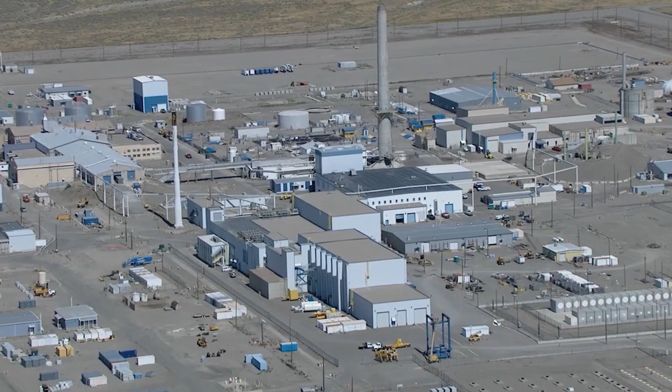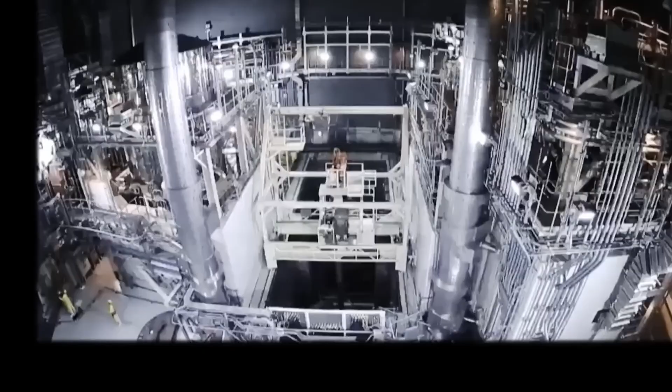80 years ago, the United States pioneered a revolutionary nuclear technology. Now, in an isolated stretch of China's Gobi Desert, that forgotten dream has roared back to life. China has just launched the world's first fully operational thorium molten salt reactor. And while most of the world is still obsessed with uranium, Beijing has leapfrogged into the future with a safer, cleaner, nearly waste-free alternative. Could this silent shift reshape the world's energy dominance?

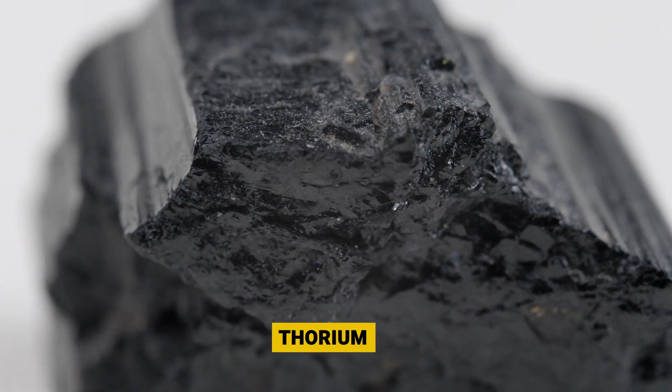The fuel America left behind. Once upon a time, thorium was America's next big thing. Buried in beach sands and abundant across the globe, this silvery metal had the power to change everything about nuclear energy. It didn't explode. It didn't produce long-lived waste. And it couldn't be weaponized.

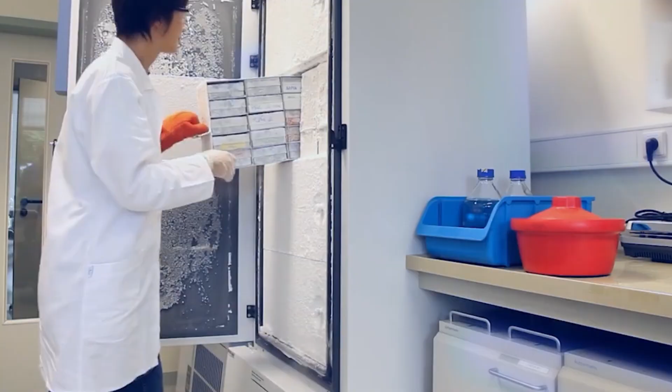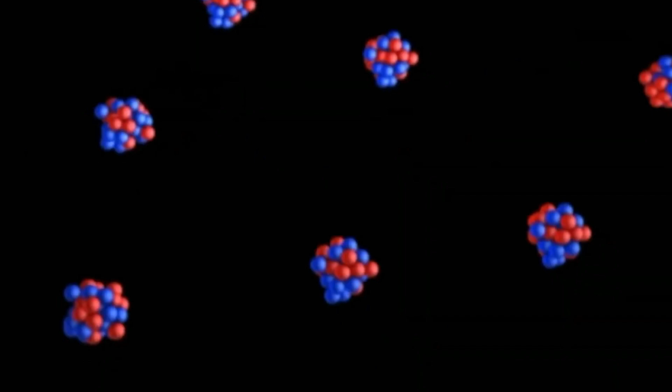Back in the 1950s and 1960s, scientists at Oak Ridge National Laboratory in Tennessee were seriously exploring thorium as the future of atomic power. They even built a working prototype reactor powered by it, a molten salt reactor, which we'll get to in a bit. But then something strange happened. The US walked away. Not because thorium failed, but because it couldn't help build bombs.

Thorium is a fertile element, meaning it needs to absorb a neutron to become uranium-233, which then fissions to release energy. That's great for energy, but not for weapons. So while thorium was safe, efficient, and abundant, uranium and plutonium were better suited for Cold War stockpiles. The military dictated the energy direction, and thorium was left behind, gathering dust in the archives.

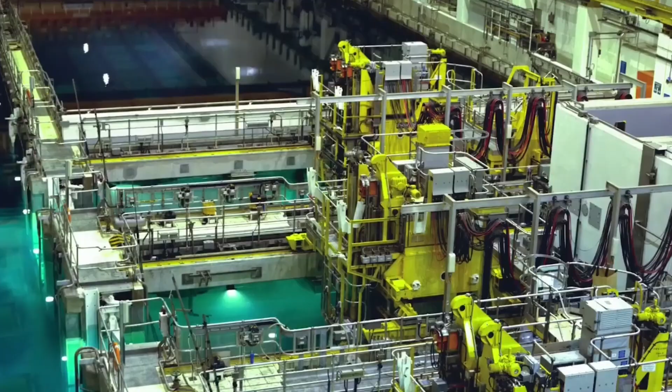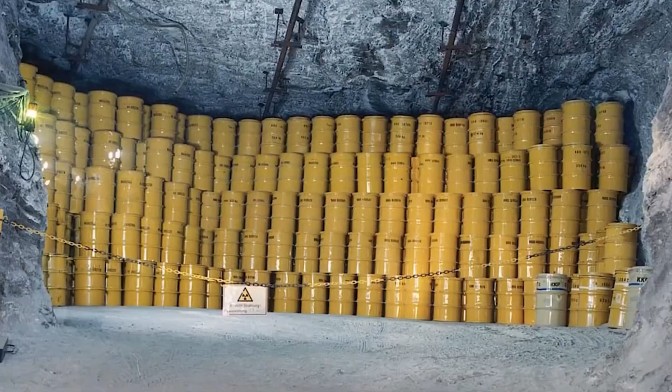This abandonment wasn't just short-sighted. It was tragic. Thorium doesn't produce the same dangerous isotopes that uranium does. It's resistant to meltdown scenarios, doesn't create bomb-grade waste, and its radioactive byproducts decay within a few hundred years, not tens of thousands. In short, it's the kind of nuclear fuel the world wishes it had embraced but didn't.

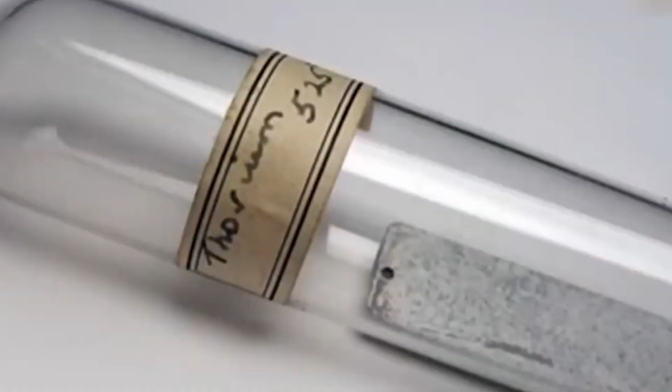Why? Because in the Cold War mindset, dual use was everything. If your reactor couldn't also churn out weapons-grade material, it wasn't worth the investment. The US threw its weight behind light water reactors powered by uranium, which could feed both civilian grids and nuclear arsenals. Thorium, with all its peaceful potential, became an inconvenient footnote.

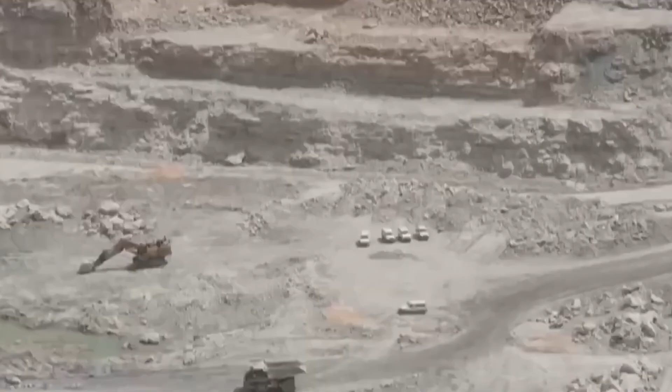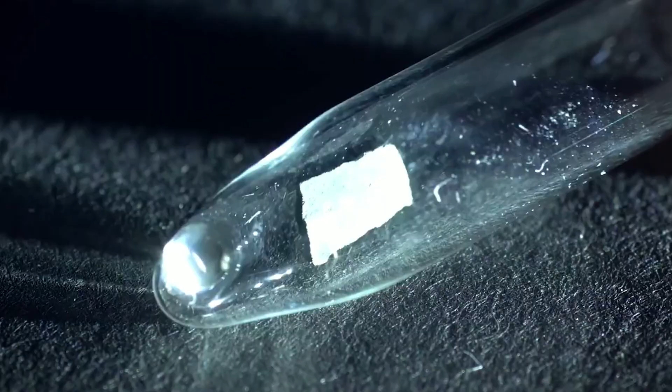But the story doesn't end there. In the 1990s, much of the research from Oak Ridge was declassified. The blueprints for the molten salt reactor were released to the public. Anyone could access them. Anyone could build on them. And one country quietly took notice, not to build bombs, but to build the future.

So if the US had the technology all along, what exactly was it? And why was it considered too advanced to use? Molten salt. Imagine a nuclear reactor with no pressure, no boiling water, no risk of meltdown, and almost no waste. Sounds like a fantasy, right? That's exactly what molten salt reactor (MSR) technology promised over 60 years ago. And yet, it was deemed too radical, too unfamiliar, and too politically inconvenient to pursue, until now.

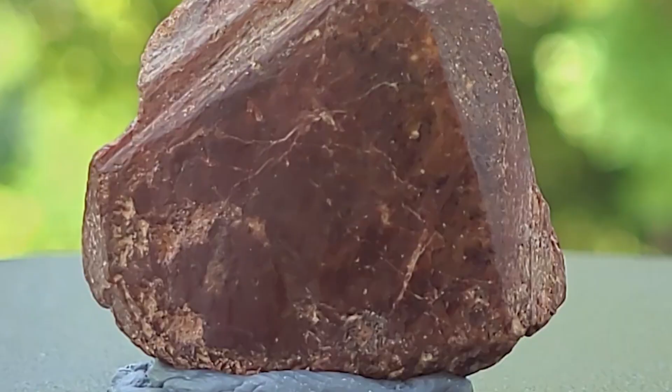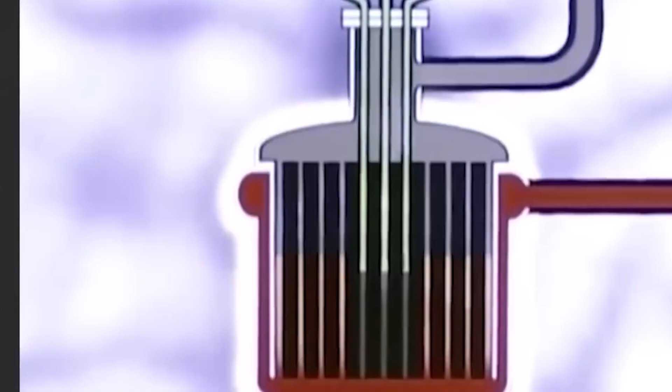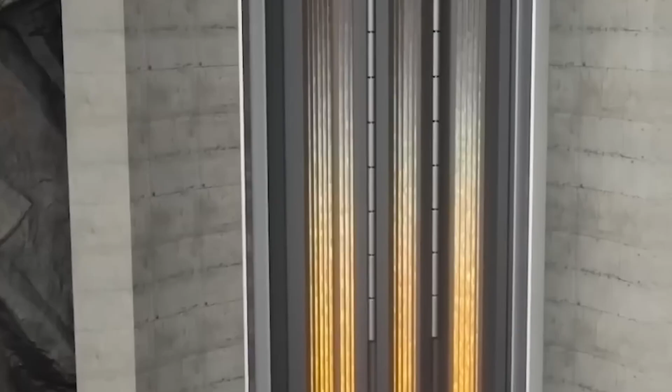Here's how it works. Instead of using solid uranium rods submerged in pressurized water, MSRs dissolve nuclear fuel, like thorium or uranium-233, directly into a molten salt mixture. That glowing liquid circulates through the reactor, transferring heat to a turbine system that produces electricity. Because the salt has an incredibly high boiling point, over 1,400 degrees Celsius, there's no need for pressurized systems. That means fewer moving parts, less chance of rupture, and almost no risk of a catastrophic steam explosion.

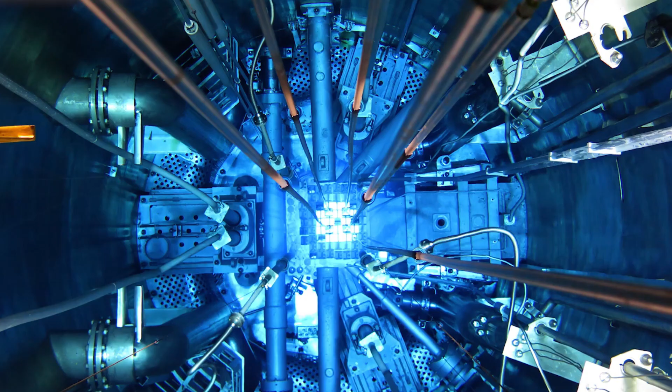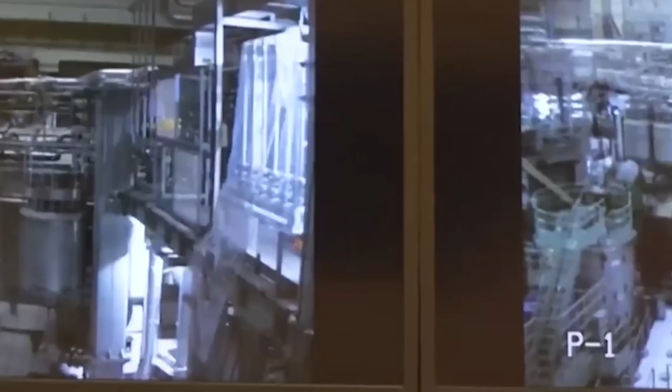But the real beauty of the design lies in its safety. Underneath the reactor sits a plug of frozen salt, kept solid by active cooling. If the power fails, whether from an earthquake, cyber attack, or even war, the cooling stops, the plug melts, and the liquid fuel drains into passive storage tanks where the reaction stops naturally. No explosions. No meltdowns. Just gravity and chemistry doing their job.

The Oak Ridge team in the 1960s ran a molten salt reactor for years. It worked. It produced power. It was clean, safe, and reliable. So why was it abandoned? Because it didn't fit the playbook.

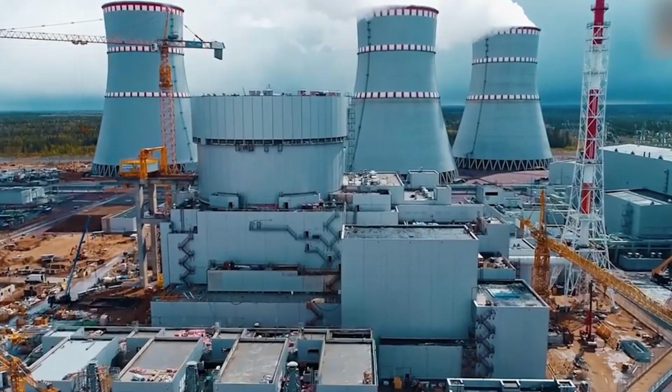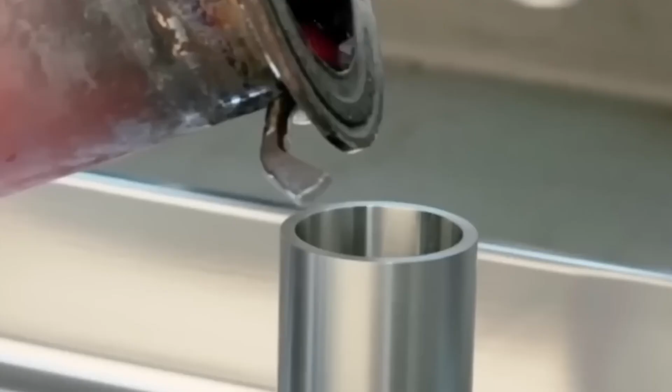Light water reactors were already being rolled out across the country. There were contracts, suppliers, and infrastructure built around uranium. Switching to MSRs would have meant rewriting the entire nuclear industry. Not to mention, MSRs couldn't produce plutonium-239 for weapons. And in the Cold War, that mattered.

So who finally picked up the torch, and where is this radical reactor running today? Inside China's silent breakthrough in the desert.

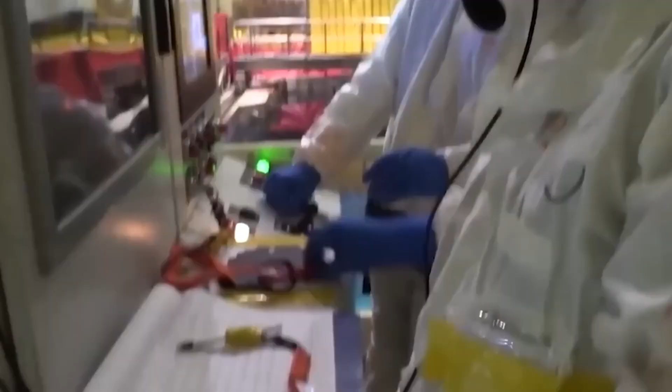Thousands of miles from the skyscrapers of Shanghai and the political halls of Beijing, an unassuming hum resonates across the wind-scoured sands of the Gobi Desert. There, in a region so barren it might as well be another planet, China pulled off something the West gave up on decades ago. In the middle of this hostile environment, without fanfare or even a press conference, the world's first operating thorium molten salt reactor, TMSR-LF1, quietly came to life.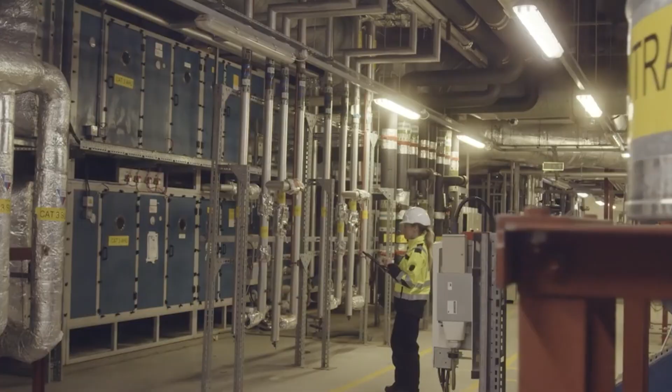The achievement was as symbolic as it was scientific. TMSR-LF1 reached criticality in October 2023, a milestone that meant the reactor had begun a self-sustaining nuclear reaction. But unlike traditional uranium reactors, this system didn't need massive cooling towers, pressurized chambers, or gallons of water. Its fuel and coolant were one and the same, a cocktail of molten salts laced with thorium. The result? A nuclear reactor that could run in the middle of a desert, cooled by air alone, impervious to the water scarcity challenges that plague conventional systems.

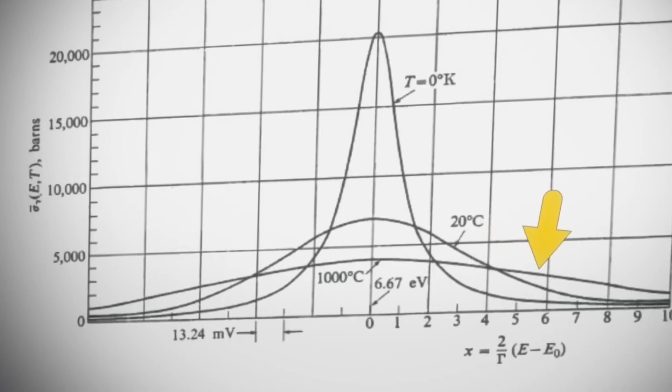By mid-2024, the reactor was generating 2 megawatts of thermal energy. While that number may not turn heads in the conventional nuclear world, the importance lies not in the quantity but in the quality of operation. This wasn't about powering a city. It was about proving a paradigm.

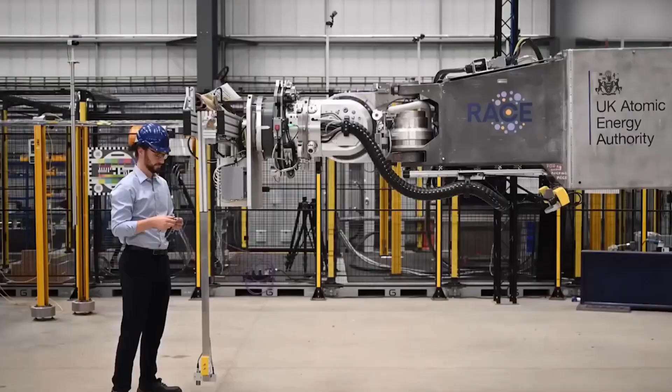And in October 2024, the reactor did something no commercial reactor has achieved. It was refueled while still running. No shutdown. No restart. Just continuous, stable output, a concept long dreamed of by engineers but never successfully realized at scale. At the center of this quiet revolution is Dr.

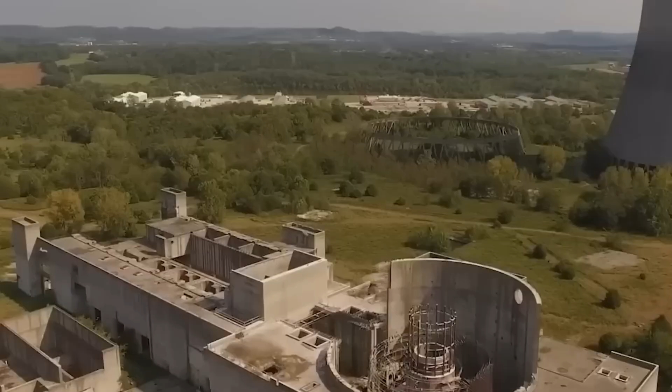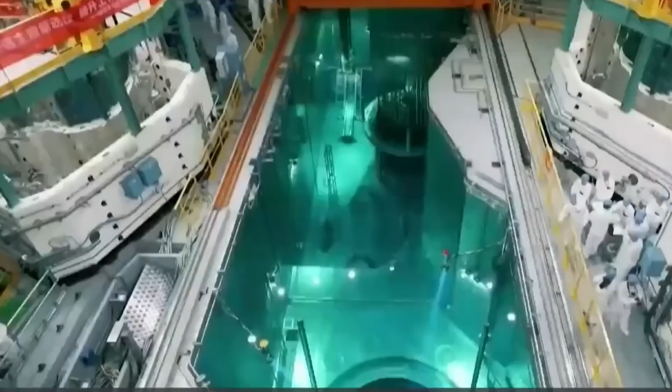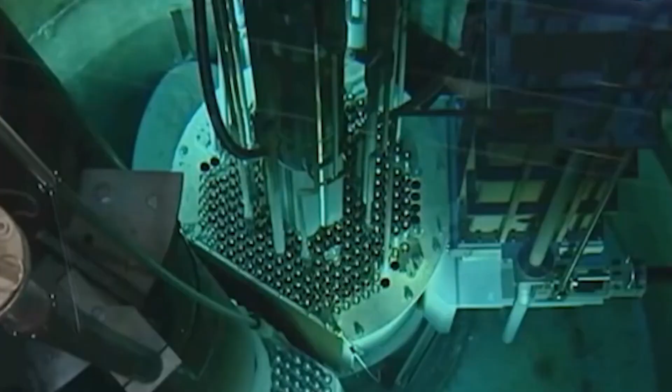Xu Hongjie, a physicist from the Shanghai Institute of Applied Physics. With little more than a skeleton crew at the start, Xu led a team that expanded to over 400 experts in just 2 years. Their mission? To revive the molten salt technology pioneered by Oak Ridge National Laboratory in the 1960s, and to do what the Americans never finished. They scoured old declassified documents, modernized reactor designs, solved corrosion issues, and built a fully operational system, all without the headline-hungry posturing that often accompanies such breakthroughs in the West.

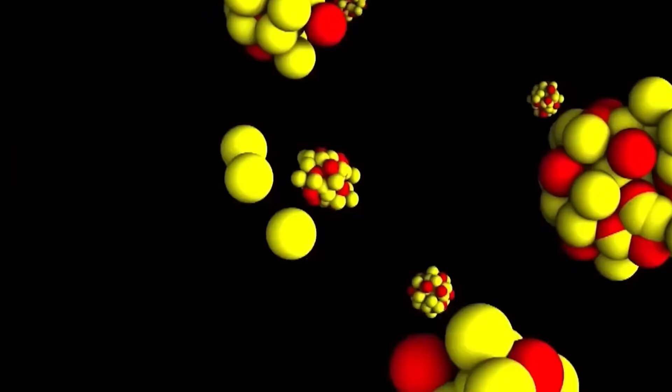Why the Gobi Desert? The reasons are both practical and symbolic. It's a secure, remote location with little risk of outside interference. But it's also a place where nothing grows, a stark backdrop for planting the seeds of a future that could change the world's energy landscape. The choice says everything. While others argue about the risks of nuclear innovation, China is quietly building it, in the silence of the sands.